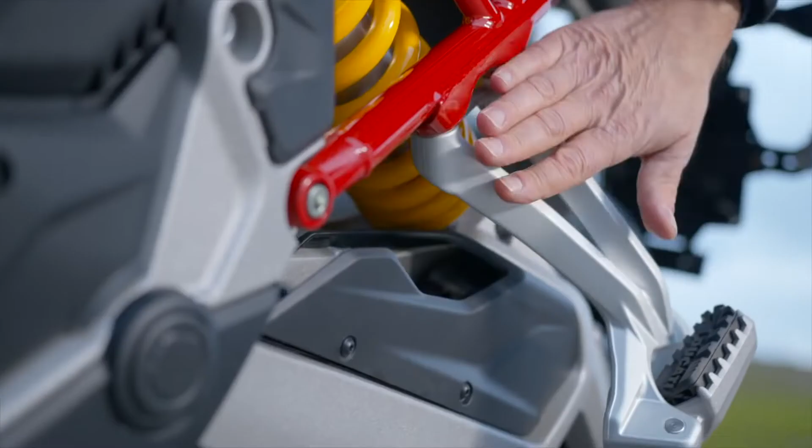Standing riding was widely considered during development, and this is visible from a number of details. For example, the rear foot peg holder plates are very slim to allow an optimal off-road use of the bike.

At the centre of the bike is the engine, the heart, the new V4 Gran Turismo. It is an extraordinary engine for a top-of-the-range dual bike. 1200 displacement, almost 13 kgm of torque, 170 horsepower, 67 kilograms. A truly small and compact engine.

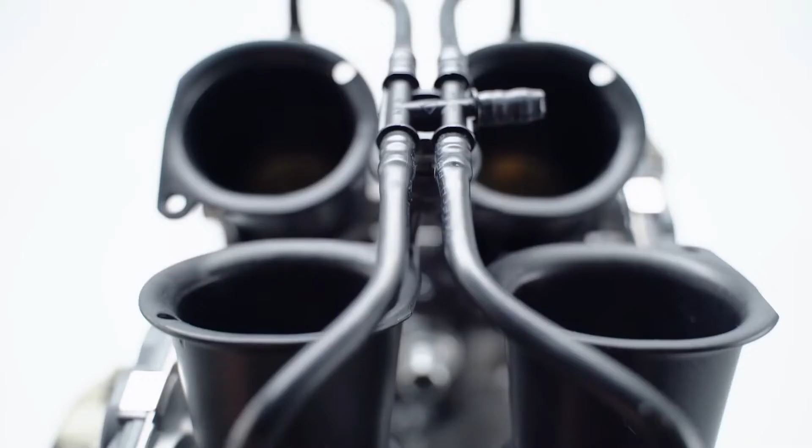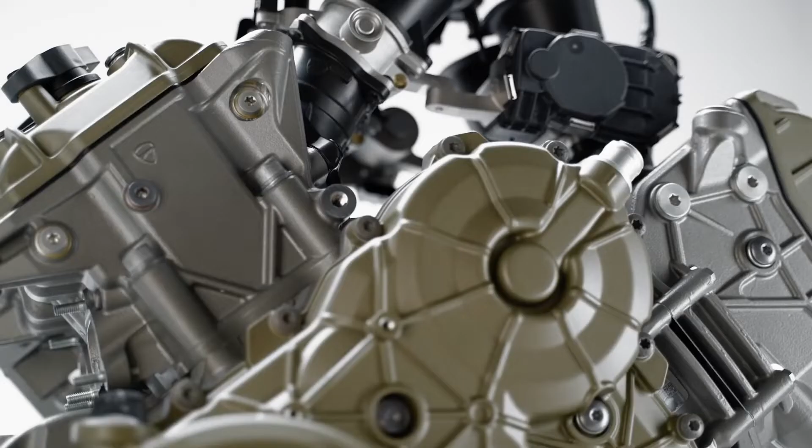This engine already holds a record in the motorbike world: 60,000 kilometers from the start to the first major maintenance interval, which is the valve clearance adjustment. This is a truly important feature for a bike destined to cover many kilometers.

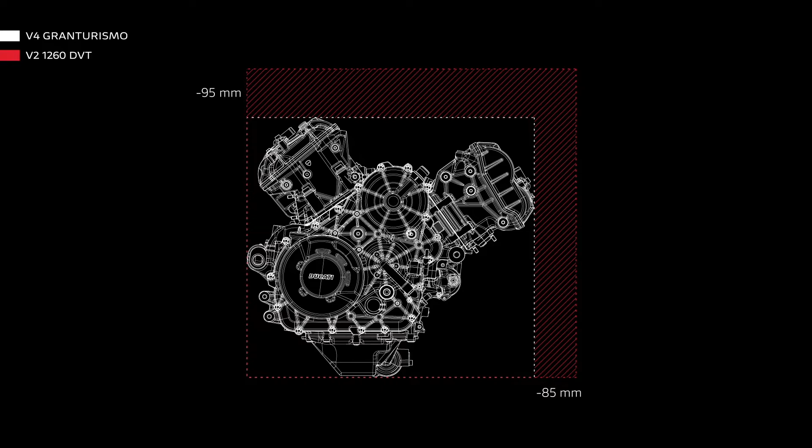This engine is light and compact. It weighs only 66.7 kilograms, 1.2 less than the 1260 it replaces. The engine is very compact, about 10 centimeters shorter both in height and length, and only 2 centimeters wider.

This extreme compactness is the basis of many technical solutions implemented on the vehicle, such as a very specific weight distribution and a layout with a particularly effective seat position. Once again, the engine is the real heart of the bike.

An engine with a lot of grit, 170 horsepower and almost 13 kgm of torque, but very soft and smooth at low RPM, rich in torque at mid-range and really exciting at high RPM.

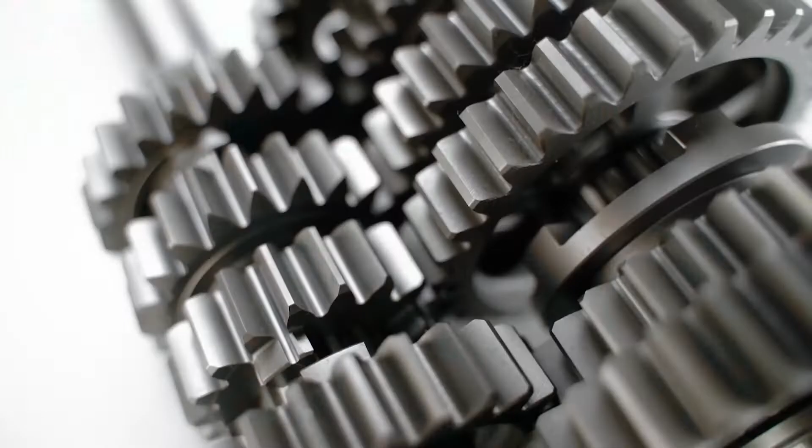No detail has been overlooked in the design of the engine to ensure it is as suitable as possible for dual use. For example, the gearbox has been specifically adapted with a shorter first gear and a longer sixth gear than the Panigale gearbox from which it derives. The first shorter gear is extremely important for both city and off-road use, while the sixth longer gear allows you to deal with long highway transfers at lower RPM, and therefore lower fuel consumption and greater comfort.

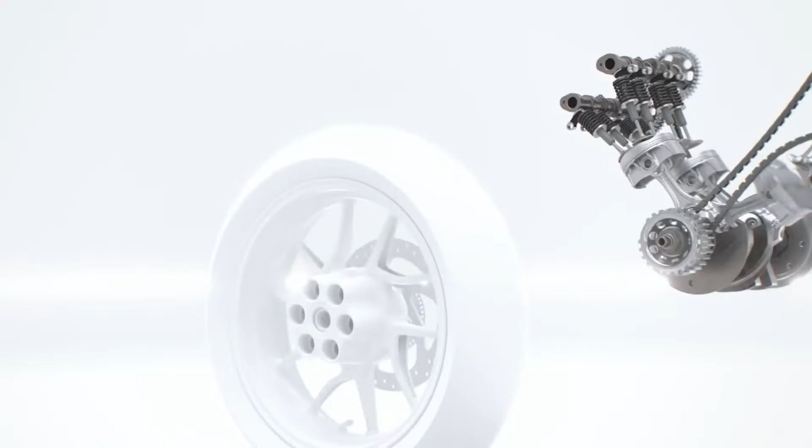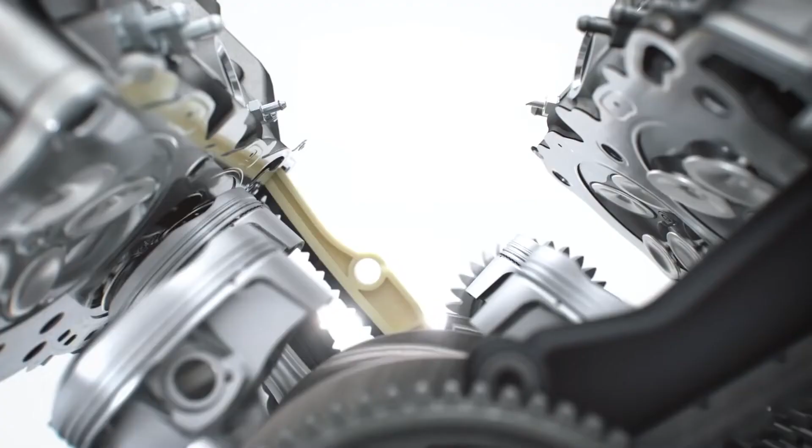The V4 Gran Turismo also takes advantage of all the technological solutions developed by Ducati in the MotoGP Championship, including the counter-rotating crankshaft, which improves handling and reduces effort even when the bike is fully loaded, and the twin-pulse firing order, which optimizes traction and offers the secondary but welcome side benefit of a very characteristic exhaust sound that distinguishes Borgo Panigale's V4s.

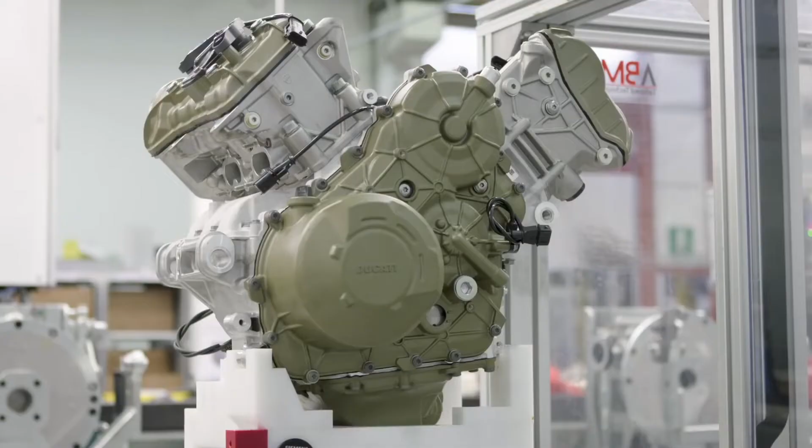The electronic package of the new Multistrada V4 represents the state-of-the-art in the motorbike sector in terms of performance, safety, connectivity and comfort. The electronic package is totally devoted to the rider, with cornering controls such as ABS, wheelie control and traction control.

Skyhook electronic suspension introduces the auto-leveling function into the Ducati world. As rider and passenger weight increases, the vehicle is automatically brought back into setup condition. There's also vehicle hold control, which helps in uphill starts. The Multistrada V4 can also be equipped with tyre pressure sensors.

As for the headlight and tail light, they feature the latest generation LED technology, with of course the cornering function. A novelty in the Multistrada world is the presence of the DRL, which has a very characteristic shape derived from the Panigale.

A new feature of this Multistrada is the 6.5-inch instrument panel. This shows a really significant amount of information and is controlled with a new switch with joystick function. This new switch is part of a set that also features all the backlit symbols, ensuring better interpretation even while riding at night.

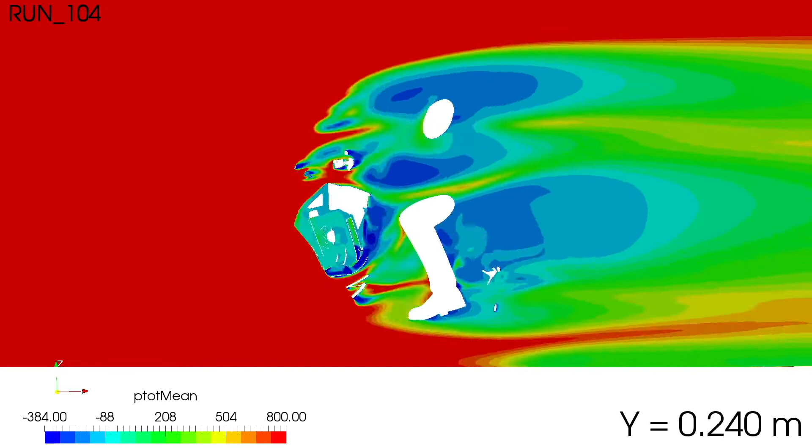Our engineers worked hard to offer a level of comfort for both rider and passenger in terms of aerodynamic protection, vibration, and segment-leading intake and exhaust noise. The body shapes of the Multistrada V4 are the result of a collaboration with Ducati Corse engineers. Many numerical simulations were carried out, as well as wind tunnel tests to exactly define these surfaces.

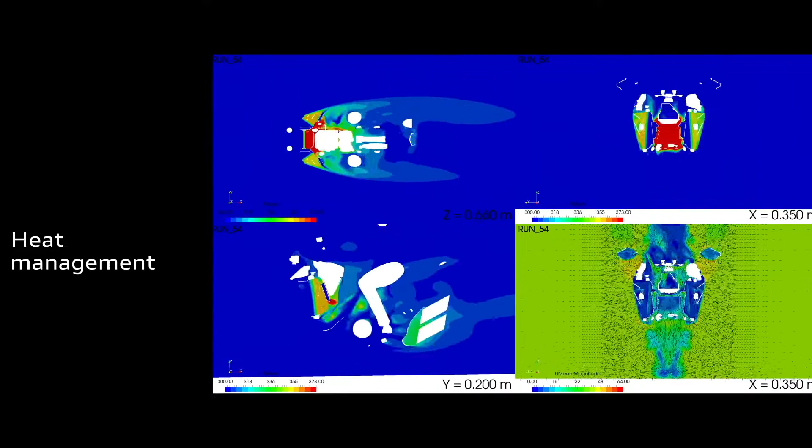A great deal of energy was devoted to optimizing thermal comfort through the creation of a series of ducts that ventilate the side of the tank, or the use of techniques such as deactivation of the rear cylinders, which switch off when the bike is at idle speed.

But let's talk about acoustic comfort. Thanks to a particularly efficient aerodynamic study, well-designed intake and exhaust silencers, and remarkably silent mechanical parts, this bike is certainly at the top of the segment.

A very important feature of the new Multistrada is a very low level of vibration. This is ensured by the layout of the V4 engine and careful optimization of the mechanical parts.

The extreme compactness of the V4 Granturismo engine has made it possible to develop the new Multistrada with a particularly interesting seat height. The standard seat can be positioned at 840 or 860 millimeters, but the bike can be equipped with a lowered seat, which still maintains 50 millimeters of foam, bringing the seat height down to 810 millimeters.

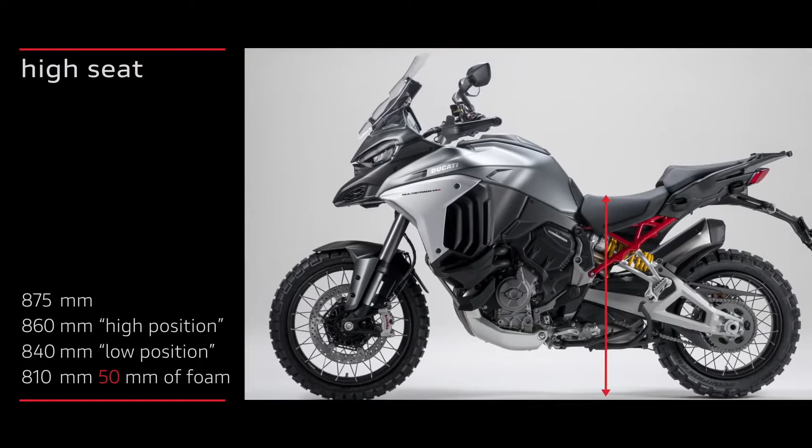The bike can also be equipped with a seat with increased thickness, raising the seat up to 875 millimeters from the ground.

The riding position has been carefully thought out. The seats are flat so as to allow longitudinal movements to increase comfort during long journeys.

The rider's seat is narrow so that you can rest your feet comfortably on the ground. Another extremely interesting feature that comes from a very compact engine in the vertical direction is the increased ground clearance, 220 millimeters, which is 46 millimeters higher than the Multistrada 1260. This proves particularly useful in off-road riding.

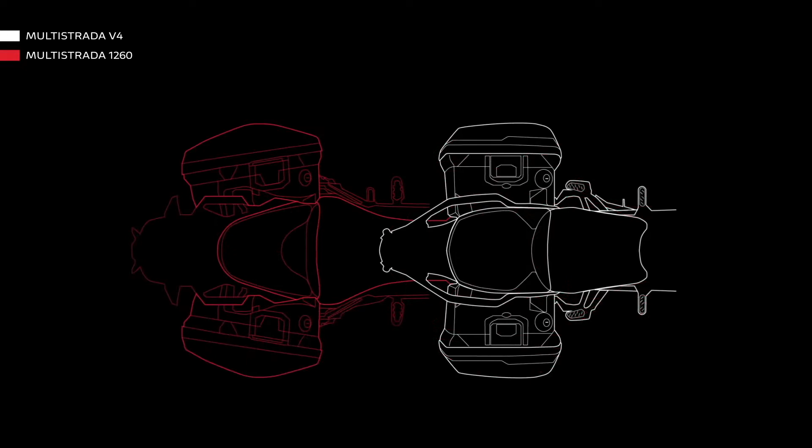For a bike of this category, passenger comfort is certainly very important, and great attention has been paid by the engineers in the development of the Multistrada V4. The passenger seat padding is 25 millimeters thicker and the lower part 40 millimeters longer. The seat is wider at the rear, the handles are more comfortable to reach, and there is more legroom for the passenger when the bags are fitted.

But how's this bike working? Alessandro Valia, our most experienced test rider, is enthusiastic about it. Multistrada V4, I renamed the bike that travels alone. Its ergonomics are perfect. You can find each control exactly where you'd like it, and when you're riding in touring mode, you just wish the journey would never end. And when you decide to go faster, all you need is a click. When I switch to Sport riding mode, everything turns red.

Andrea Rossi, recent winner of the Trans-Anatolia Rally, certifies its off-road behavior. The emotions that this motorbike is able to convey go really deep. You'll experience all this as Multistrada V4 is really fantastic, truly versatile, both on-road and off-road. Different roads, customers who like riding the bike in the most varied situations.

This is the Multistrada V4. Many configuration possibilities for our customers. The Multistrada V4 is available in red. It is the version dedicated to those who love the 170 horsepower engine and the 215 kilogram weight. The central model in the range, the V4S, will be available in red as well as in a color called Aviator Grey. The Multistrada V4S features a higher level of equipment.

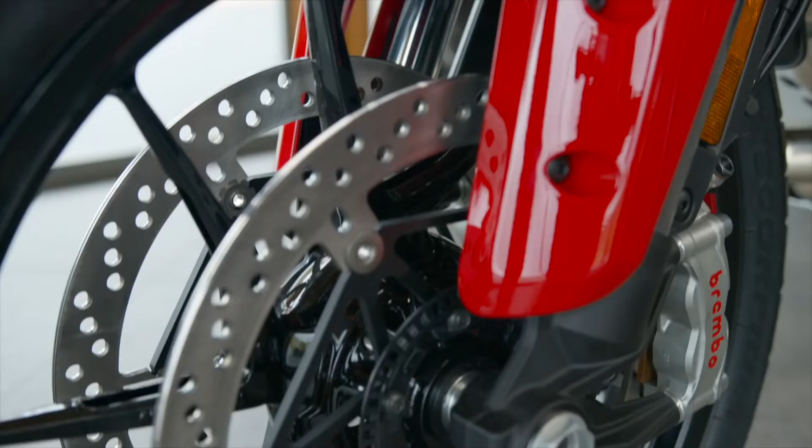As for the chassis, there are 330mm front discs with Stylema monoblock calipers and Skyhook electronic suspension with auto-leveling function. For the electronics, there is a 6.5-inch instrument panel with Ducati Connect and Sygic navigation system, an LED lighting system for headlight and taillight. The headlight also features the cornering function. A fully complete electronic package.

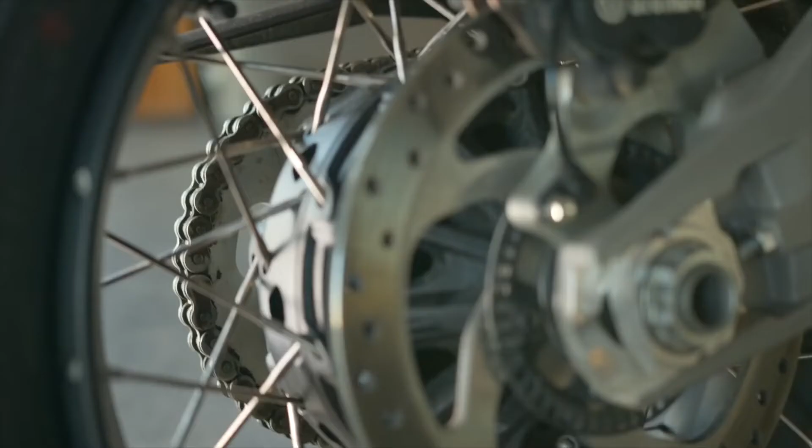The Ducati Multistrada V4S can be ordered with both alloy and spoked rims. The Ducati Multistrada V4S also meets the needs of a wide range of customers. That's why we have designed a new package of configurations that can be ordered directly from the factory.

Let's start with the essential configuration. Then, the travel outfit features side panniers, center stand, heated hand grips and heated seats for both rider and passenger. Next, the travel and radar version, where front and rear radar managing the adaptive cruise control and blind spot detection functions are added to the travel package.

More sporty customers will be pleased with the performance version that offers the Akrapovic Euro 5 approved silencer and a carbon front mudguard. Finally, for the most demanding customers, a full version is also available, containing all the options described above. In addition to the Multistrada V4 and V4S, there is a Multistrada V4S Sport, offering a dedicated bold livery and the performance package as standard, that is Akrapovic exhaust and carbon front mudguard. The V4S Sport version can also be ordered in full configuration.

So, many are the configurations of this Multistrada V4 produced in Borgo Panigale. But for those who want something even more specific, an important series of accessories has been developed for each one of the reference worlds.